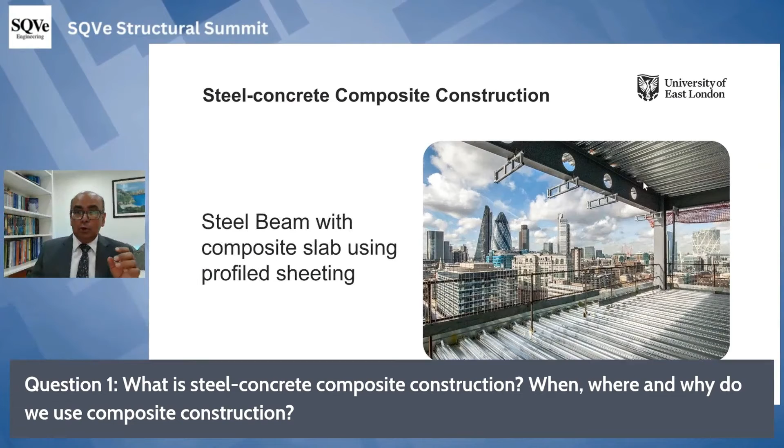In steel buildings, as you can see in this picture, we have steel beams and steel members, and on top of that we have this profile sheeting slab. Here we don't have any other option; we cannot have a complete steel slab. It's going to be really expensive and it will increase loading a lot as well.

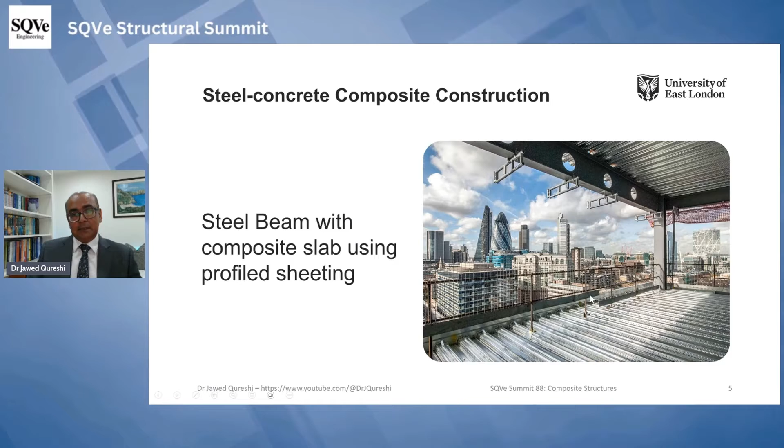So we try to use materials really efficiently. We use this thin sheeting, which is just 1 millimeter thick. We nail this sheeting to the top of the beam, then we weld shear studs through the sheeting to the beam, then put mesh reinforcement, and after that we pour concrete. Together it forms a composite system, which we call steel beam with composite slab using profile sheeting or metal decking.

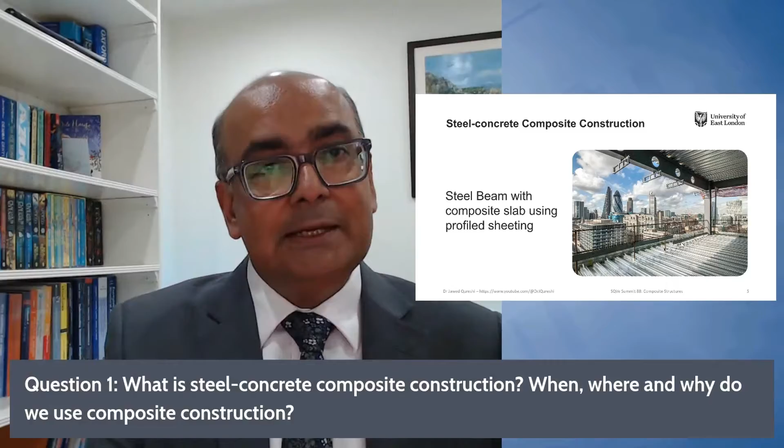Together it really forms a strong and efficient connection. In this case we don't have any other choice, although we do have the choice of a reinforced concrete slab, but I'll come to that in a minute. Now I'll move to the next possibility, which is steel concrete composite beam with pre-stressed precast hollow core slabs.

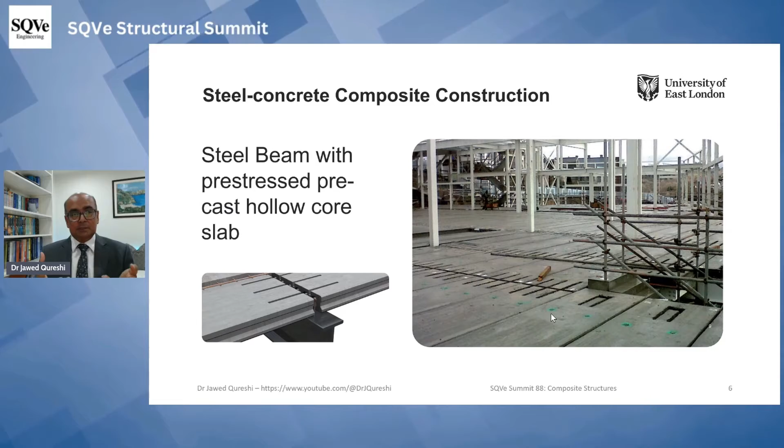Hollow core slabs are used where a lot of spanning capability is required, as much as 17 to 18 meters of column-free or beam-free space. We bring these hollow core slabs on top of the beam, the shear studs are pre-welded, we have reinforcing bar in the gap, and then in situ concrete is poured. Together it becomes a composite system.

So there are three possibilities. One is steel concrete composite beam with metal decking slab having profile sheeting. Second is steel concrete composite beam with precast pre-stressed hollow core slab. And there is a third possibility as well: steel beam with solid reinforced concrete slab.

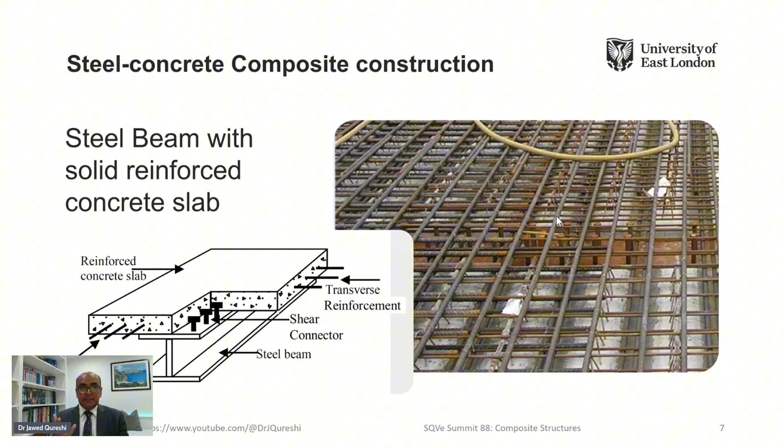Here you can see that we have a beam, and on top of the beam we have an ordinary reinforced concrete slab. But the difficulty with this slab is that it requires a lot of formwork underneath, and due to the speed of construction in steel structures, especially in Europe and Western countries, composite beams with profile sheeting or hollow core slabs are really very common, while composite beams with reinforced concrete slabs are not common because they require formwork underneath.

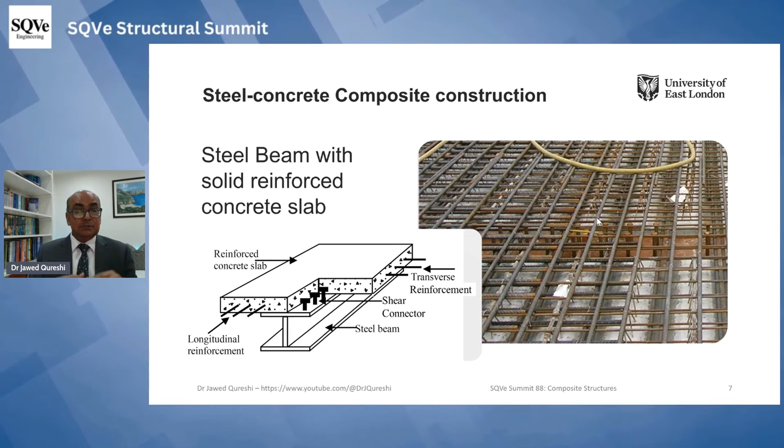So these are three types of steel concrete composite beams: one is composite beam with profile sheeting, second is with hollow core slabs, and third is steel concrete composite beam with solid reinforced concrete slab, which we do not use in Europe. I'm sure I'll ask you in a minute whether it is used in India or not.

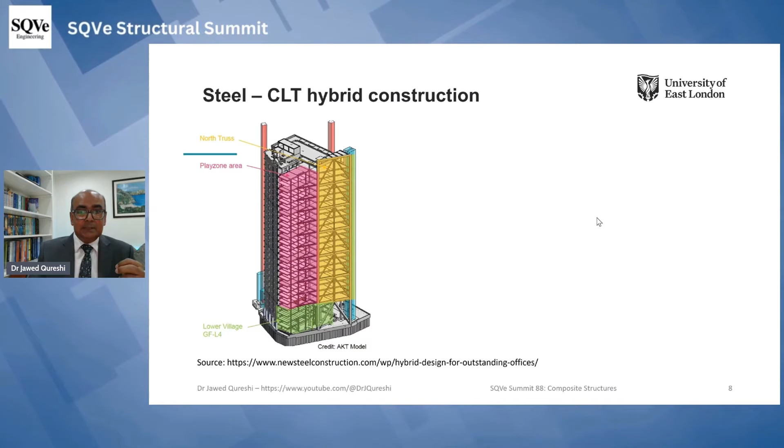Now this system is really very interesting. This is steel CLT hybrid construction. CLT means cross-laminated timber. This structure is the Edge building near London Bridge in London, a 27-story office building. In this play zone, a slab made up of cross-laminated timber is used on top of steel beams. This building is to be completed in 2026.

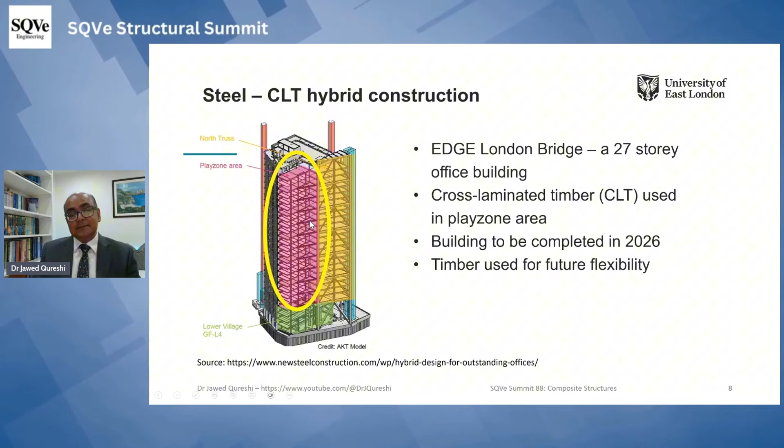Timber was used for future flexibility so that we can remove it. It's demountable and we can reuse these structures. This is one of the key things: reuse of structures will be the future of construction and structural engineering, and there will be a lot of emphasis on this area.

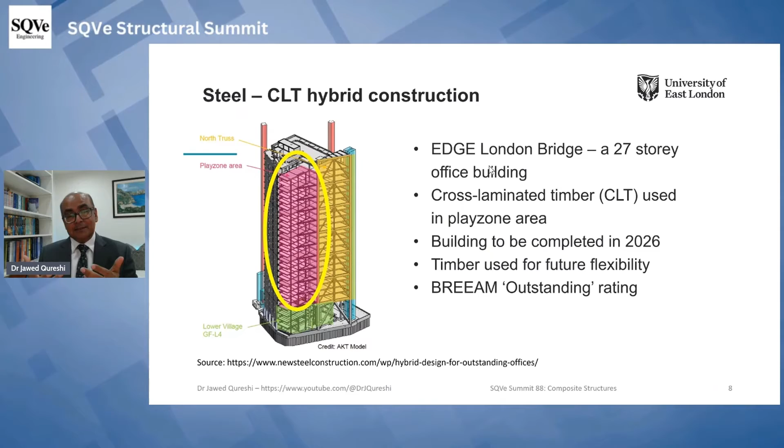This building has got a BREEAM rating of outstanding. BREEAM and LEED are organizations in Europe which rate buildings as per their sustainability requirements, and this has got an outstanding rating. By the way, this Edge building is different from the Edge building in Amsterdam, Netherlands, which has got a 98.9% BREEAM rating, which is really highly sustainable. It's got its own electricity generation plants inside, and it is a really sustainable building.

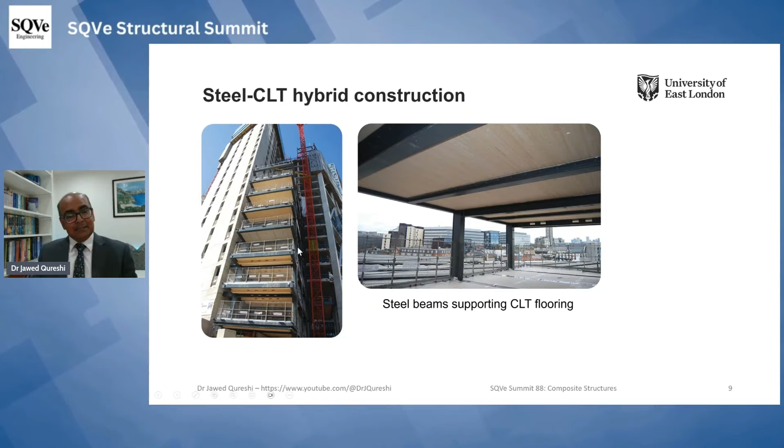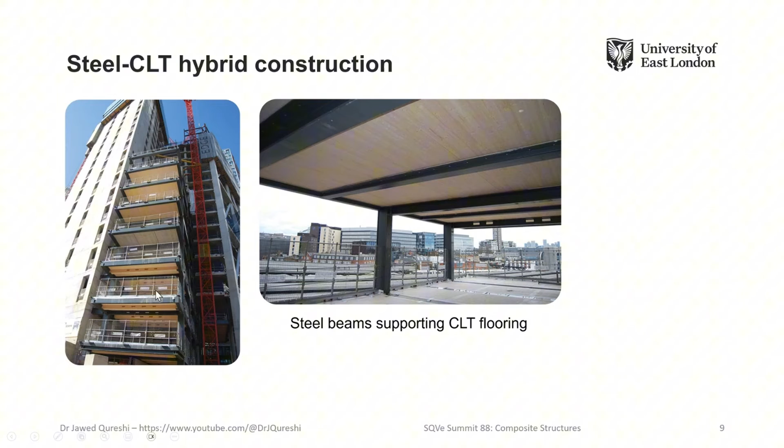This is the cross-laminated timber which is used here, and steel beams are supporting this cross-laminated timber slab. As you can see, at each fourth floor we have some other composite section, and I'll tell you the reason for that.

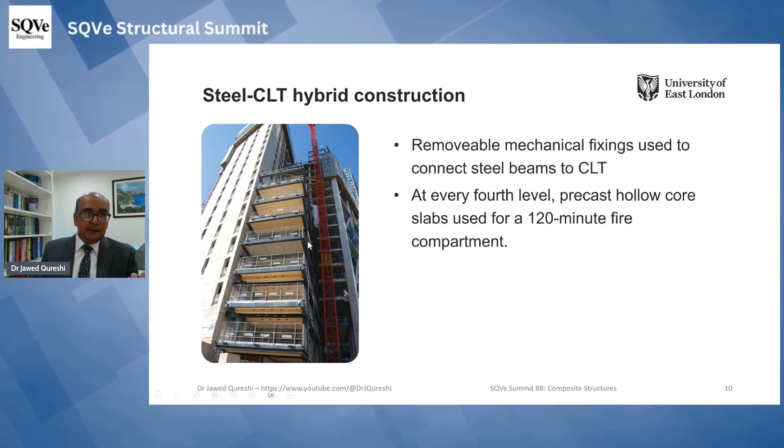Removable mechanical fixings were used in this structure so that we can reuse it in the future. At every fourth level, precast hollow core slabs were used so that we can ensure a 120-minute fire compartment. So after every fourth floor, we have precast hollow core units. You can see the color here is quite different from the color of these three floors—this is precast hollow core slab, used for fire resistance.

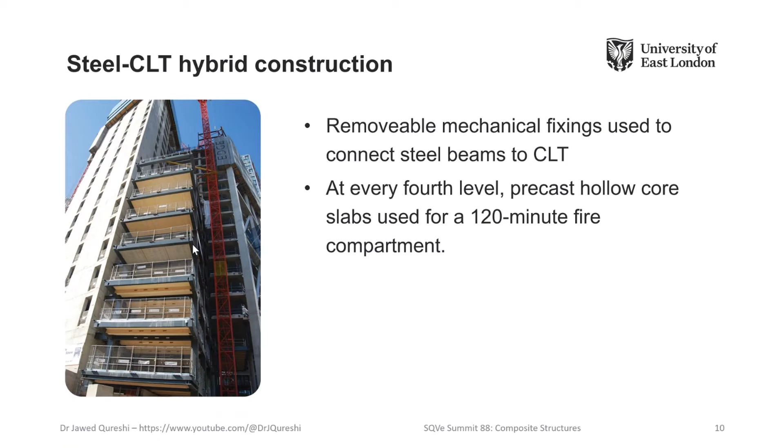And then I will move to why do we use composite structures? What will happen if we don't use composite structures? In my view, we get at least 25 to 30% saving in terms of material cost if we utilize composite action.

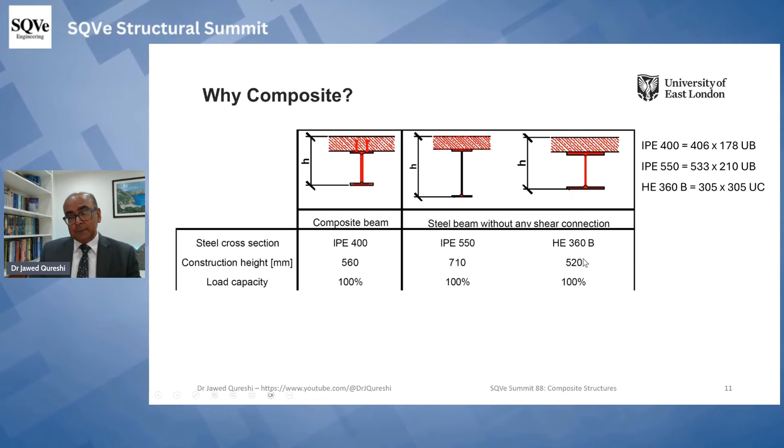Now, these are three examples: composite beam with 406 178 universal beam, and the second is non-composite beams. Here we have 533 210 and 305 305, this is a column section. Now all these sections have the same loading capacity and construction height. You can see it's 560 over here, and in case of non-composite it's 710. For universal beam, normally we don't use universal column as beams.

Here you can see steel weight is 100%. Here it is 60% more in case of non-composite I section. In case of non-composite column section, you can see it is double. It means significant reduction in cost.

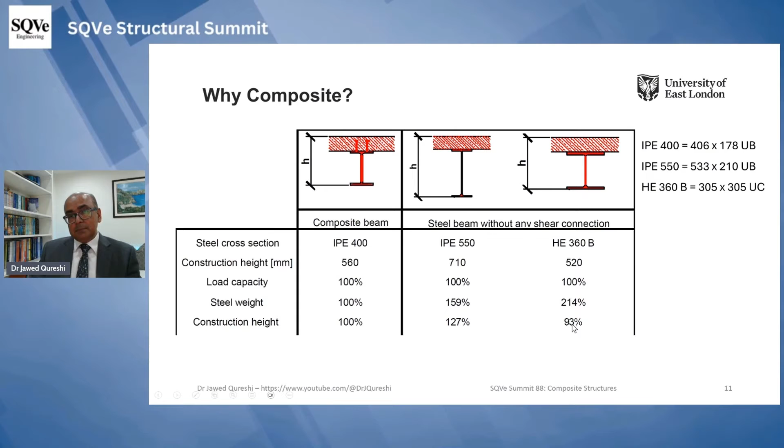Construction height is really very important. Here you can see construction height is 127. It's 27% more in case of non-composite beam, and in case of universal column it is 93. It is important to note that stiffness is quite a lot as well. In case of non-composite, stiffness is 72, and in case of column, it is just 46.

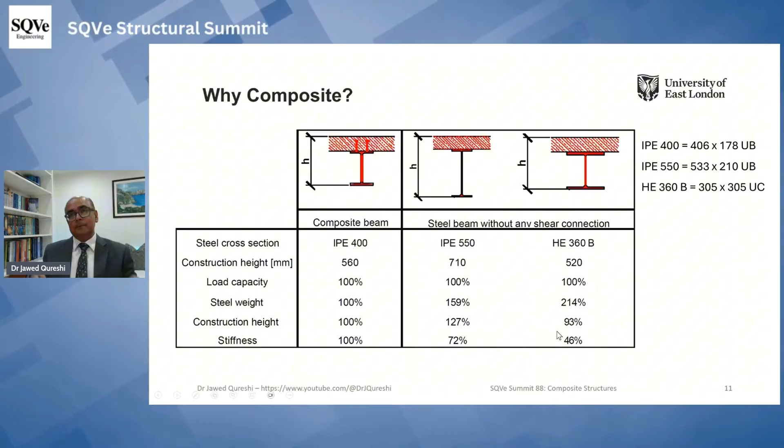Can I say that by using steel concrete composite structures, we are able to save materials because steel weight is less, we are able to have less construction height, and we are able to have a stiffer section, which leads me to this idea that steel concrete composite structures are strong and stiff.

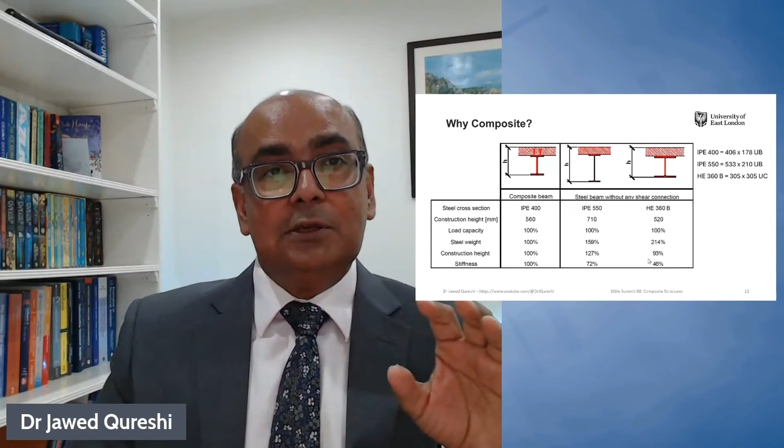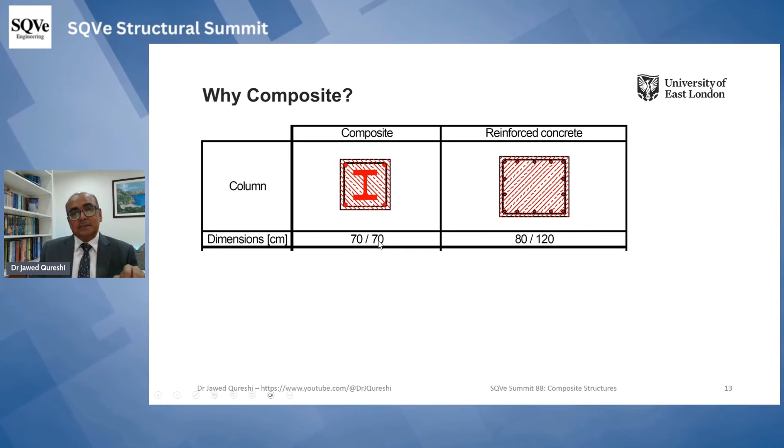Now, the same is the situation with columns, but composite columns are not very common. In case of composite column, the dimensions are 70 by 70. In case of reinforced concrete, it is 80 by 120. In case of a beam, it is 160 by 40, and here it is 160 by 120. So you can see significant reduction in height. I'm not sure about the cost of these, and these type of sections are not very common as well.

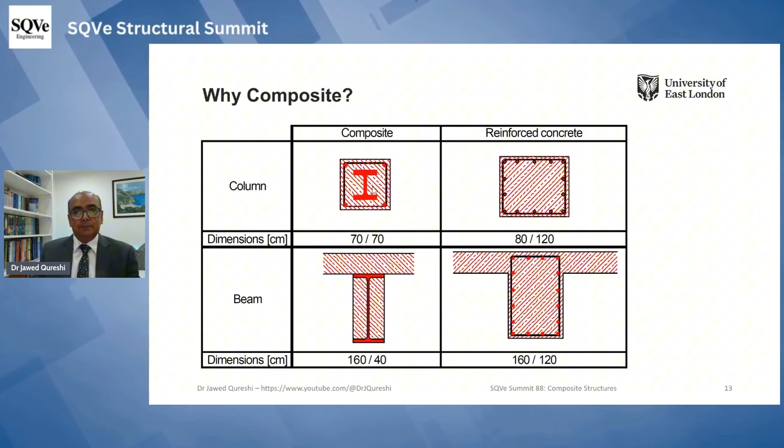But steel concrete composite beams are really very common. Now this leads me to a question for you: how many of you have worked on a composite construction project, and what is the most common composite slab in India? Type your questions in comments down below.

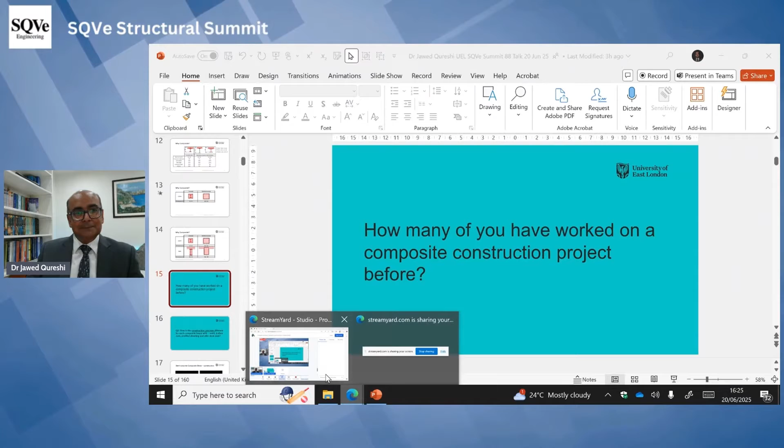That was quite daunting. I was just talking to the screen, but hopefully people would have seen me. That's absolutely fine. Yeah, so the responses have started coming now.

So composite deck slab is common. Composite deck slab, steel beam with metal decking. Metal decking, all right. Deck slab, deck slab, then only deck sheeting slab. Deck sheeting, yeah, all right. Yeah, so I've worked quite a lot on this. I have worked quite a lot on this area. I did lots of testing. I'll show you as well today. Concrete with metal bars, metal bars.

All right, what does it mean by metal bars? I'm not sure, so Varun, could you please elaborate this? One more thing, it's a new thing for me, I want to learn. Using composite slab with metal decking. Yes, okay, and deck slab with steel beams. All right, deck slab, yes. Also composite column for an expansion project. Expansion project, all right, okay. Yes, absolutely, deck sheet, deck sheet. Okay, Atul Dubey is saying that we are only designing composite joist in deck slab and composite column, composite column as well, all right.

Deck RCC slab over steel plate girder in railways. Is it on railways? Okay, that's interesting, I want to know more about it.